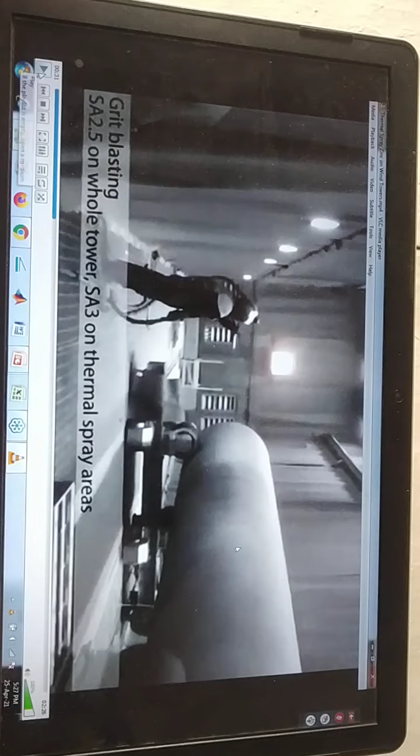First the blasting will be carried out and then the thermal spraying will be carried out. So it will result in a very thin coating. Later on we will see some processes resulting in a thick coating.

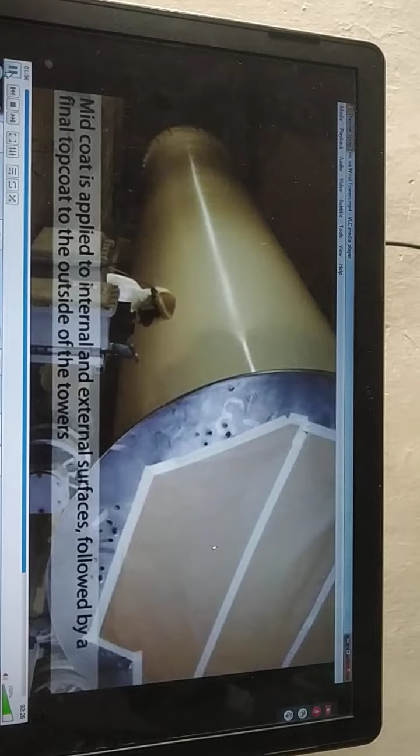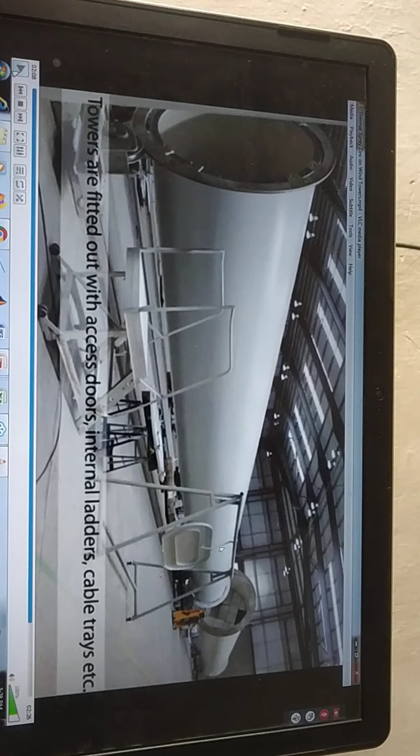So the workpiece needs to be rotated continuously. So this is different from our hot dipping process. Yesterday we had seen the hot dipping operation. Compared to that, this is different.

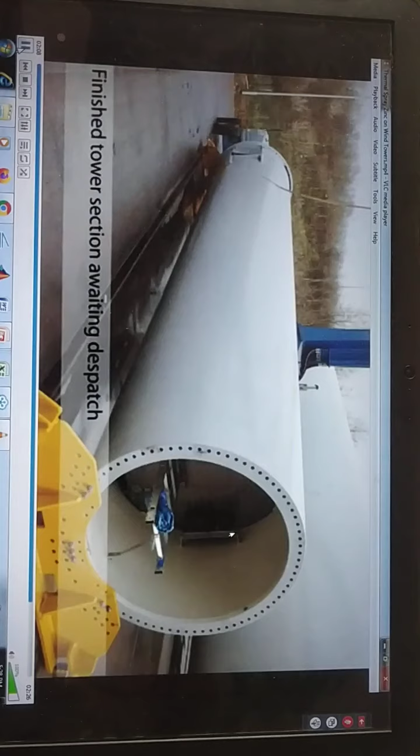Okay, so let us move further. So the spray gun. So this is the working procedure. You are requested to carefully understand the working procedure, which is very simple. That is why we can move further quickly. So here we can save the time on each process.

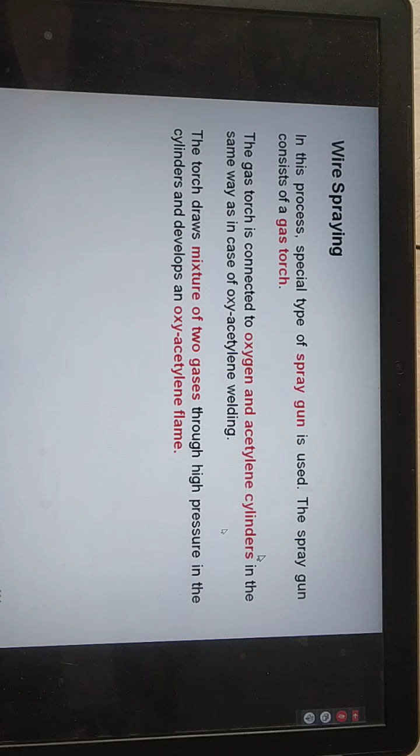Meher Panchal. Mihir. Harshal Chaudhary. Yes, sir. Are you getting it? Yes, sir. Okay.

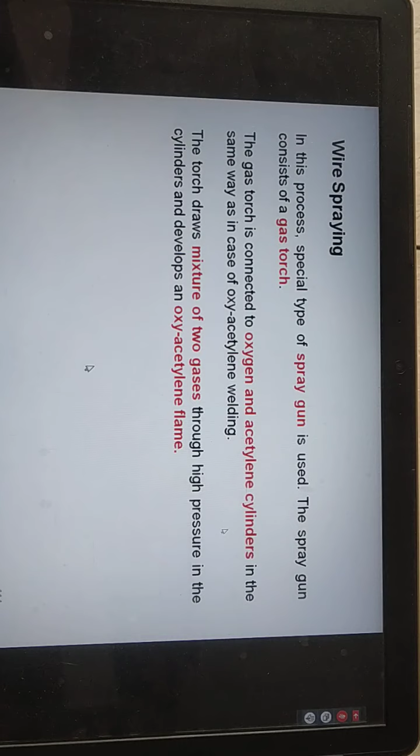So let us... So the procedure is mentioned here. Please understand the procedure very carefully.

So all the products, metallic products, are ultimately subjected to some protective coating, and for that either of these processes will be used. So powder spraying, in that the raw material will be in the powder form, whereas the approach is almost similar. Since finally the material is melted, it is not going to create any problem.

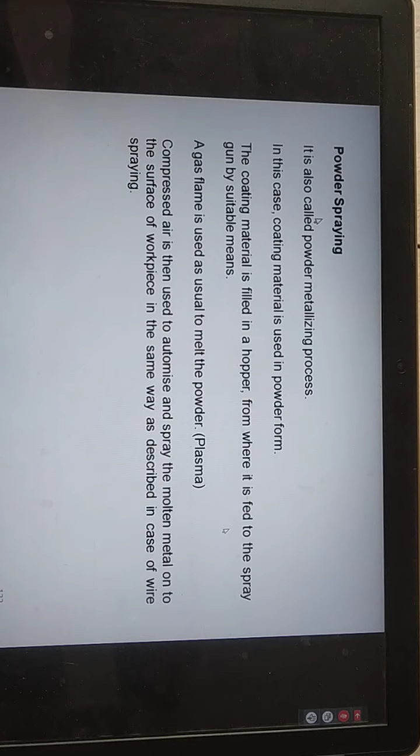Palandra, I hope you are getting it, this metal spraying. Yes, sir. Okay. So even you can see here any blades or any such individual parts of some equipment, those will also be subjected to it.

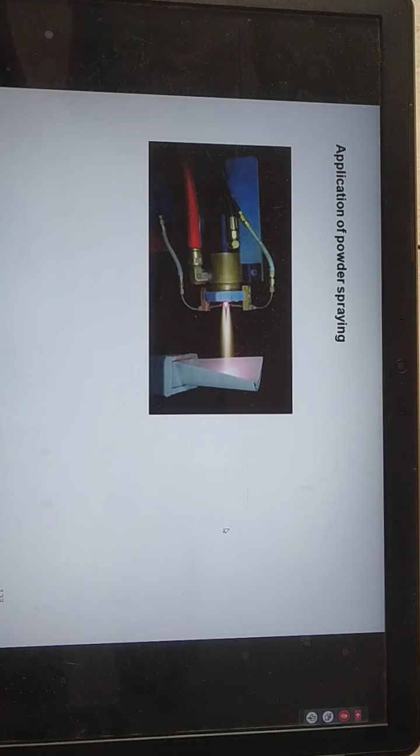You can see the gun. I am interested to show you the gun. So that one common part will have several inputs through which the wire, that metal particle, air, oxygen, those gases will come, and then inside, the combustion will be carried out. So ultimately that gun is nothing but a combustion chamber inside. Okay, so in that we are carrying out the heating and then melting, and then it is sprayed with the help of compressed air.

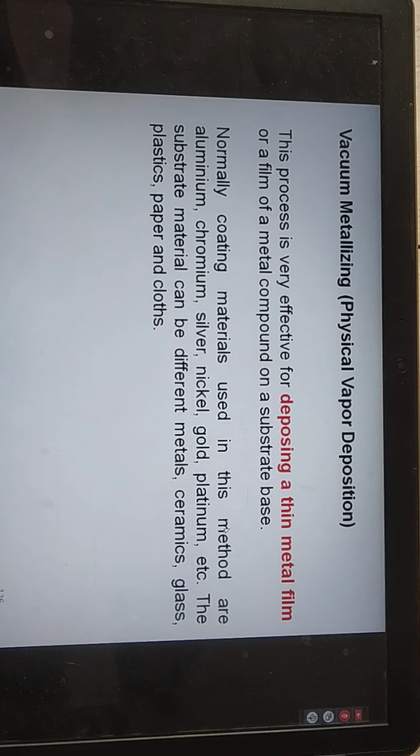Now the next process, a very old process, physical vapor deposition. In short, it is referred to as PVD. It's a very old process. So let us understand this process. So typical coating materials like chromium, aluminium, nickel or any such can be effectively deposited in the form of a thin layer, a thin film.

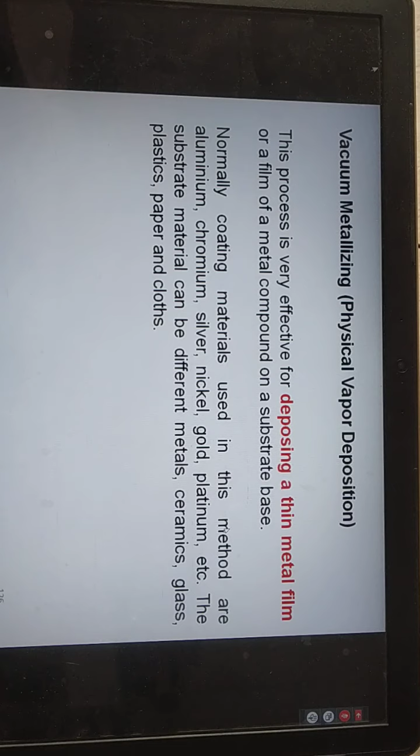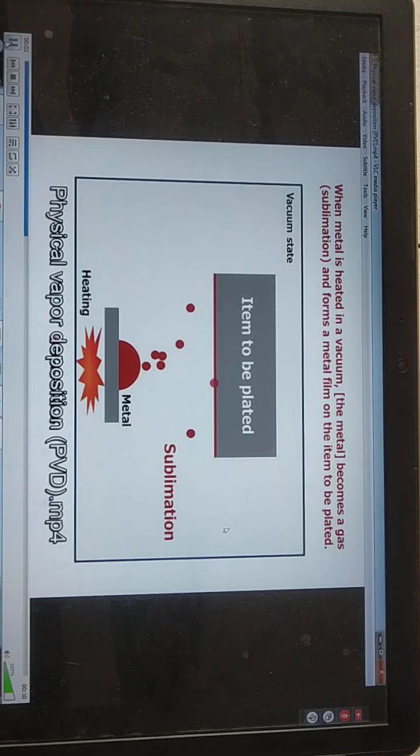So this way, that vacuum is helping us here. So with a very small 10-second animation, you can understand it. So physical vapor deposition: in the form of vapor, the metallic particles are deposited. Okay, so you are requested to draw this diagram quickly. But a very thin layer will be deposited again here.

Rahul Sari. Uraj Darji. I hope you are getting it. Please respond quickly. Shreyash Saudari. Saloni Shah. Please respond quickly. So students are typing. I hope you are getting it. Saloni Shah, you may unmute yourself and you can interact so that your other classmates can also hear you. You are typing there. Manugar Prada. Yes, sir.

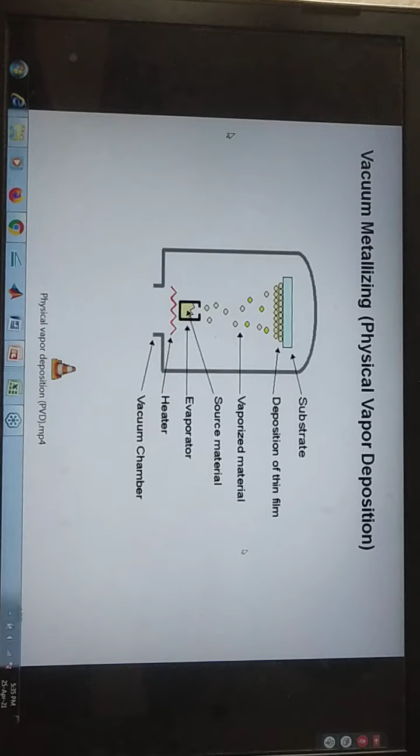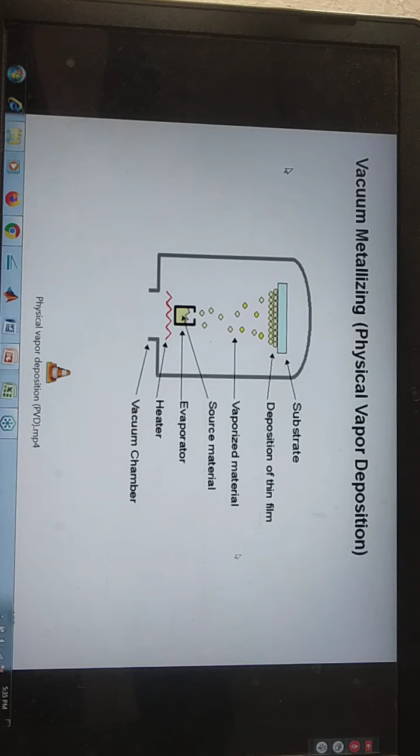Is it clear? So I have chosen some small videos, because such processes can be effectively explained with small videos. Okay, so now you are in the last stage of your graduation studies, so you are well aware of how to understand such processes very clearly. Okay, so physical vapor deposition is a very old process available in industry. So those who are interested may note down this procedure.

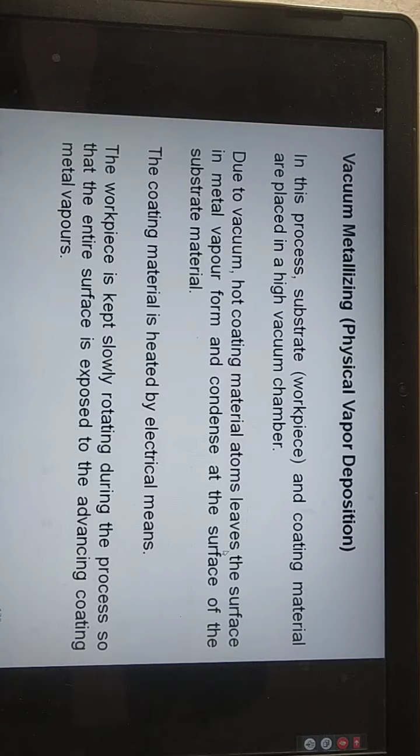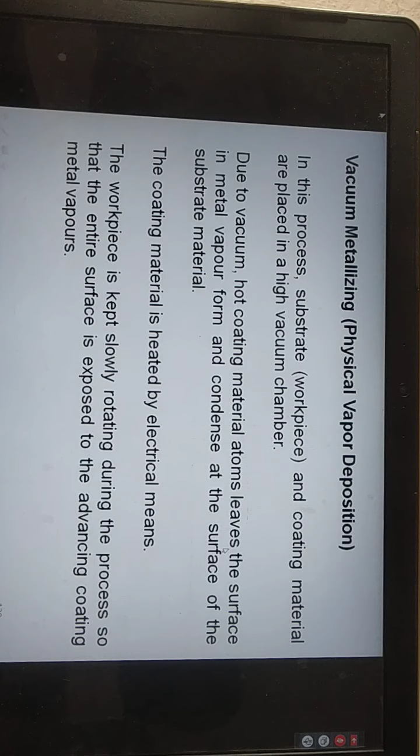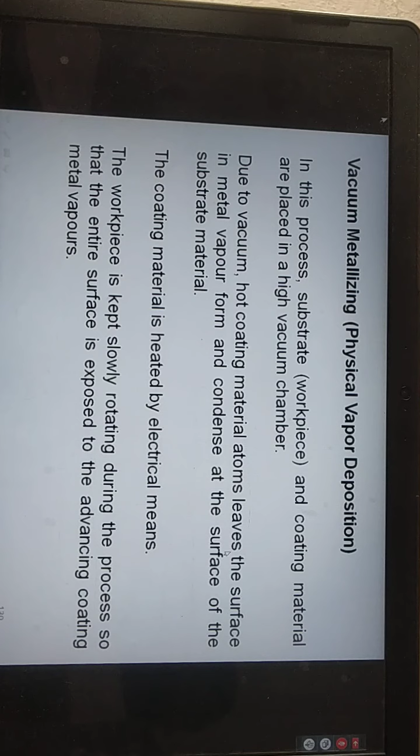So the source of heating may be some electrical source. We know that with the help of some electrical supply, we can generate some heat and the material will be heated. So the workpiece will be rotated so that the entire surface of the product will be exposed, and the rotation speed will be maintained accordingly so that uniform deposition will be obtained.

Okay. So these are some advantages: thin coating. So less quantity of metal is consumed. So wastage of material is comparatively less. So no major equipment is required for this, unlike our previous case, that is metal spraying. That gun itself is very costly, and the gun itself has its problems. So that type of equipment is not used in this. But the thing is that it is a comparatively slow process.

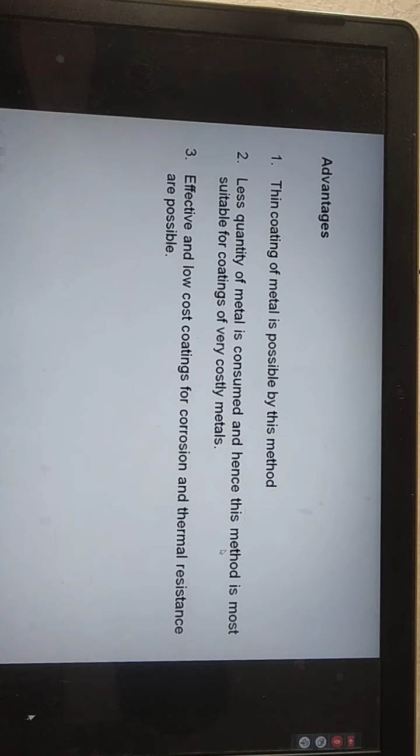Some examples are shown over here. Now the next process. So I am quickly rushing through. I hope you are getting it, but if anyone is having any doubt, one can immediately inform me, one can immediately raise the doubt. High velocity oxygen fuel spraying, HVOF.

Later on we will see towards the end one tabular information in which we will see, by which process, how much will be the velocity there and how much will be the coating thickness obtained there, average, as a representation. So high velocity oxygen fuel spraying.

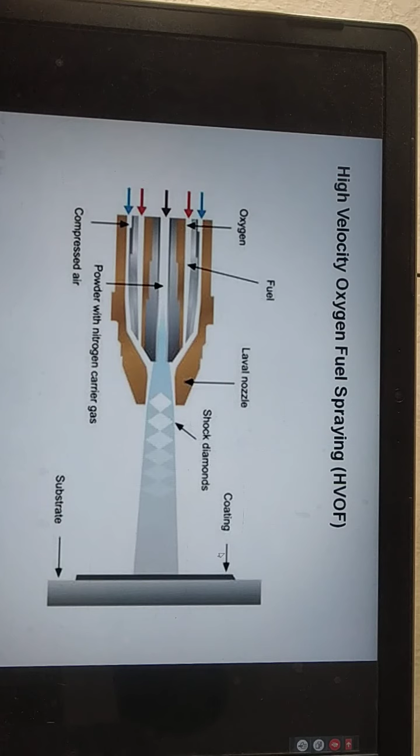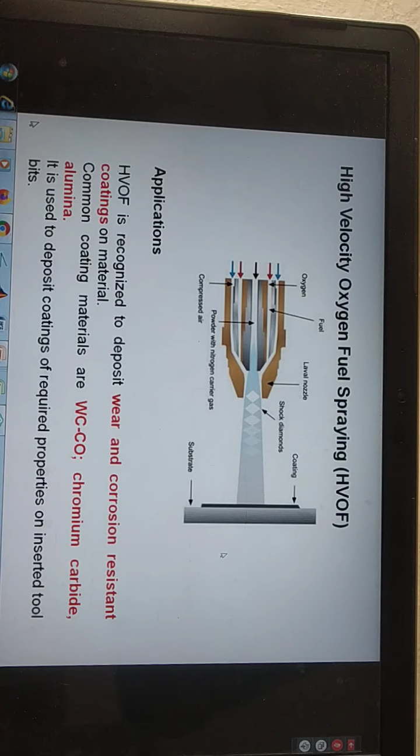So here the materials like carbides and alumina, which are very hard in nature and even having very high melting point, those are used as a coating material, and by that a very good quality wear resistant surface and corrosion resistant surface is obtained.

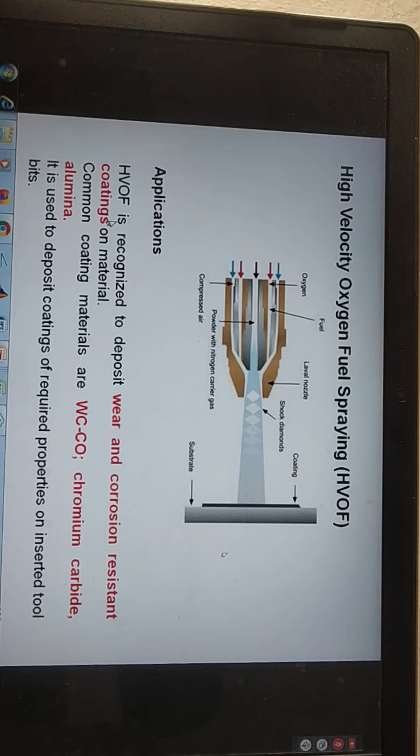So very high velocity will be generated here in that material which is sprayed. So it is very much similar to your metal spraying, except that velocity will be very high. So let us quickly see one small video. So the impact is very high here because of that high velocity.

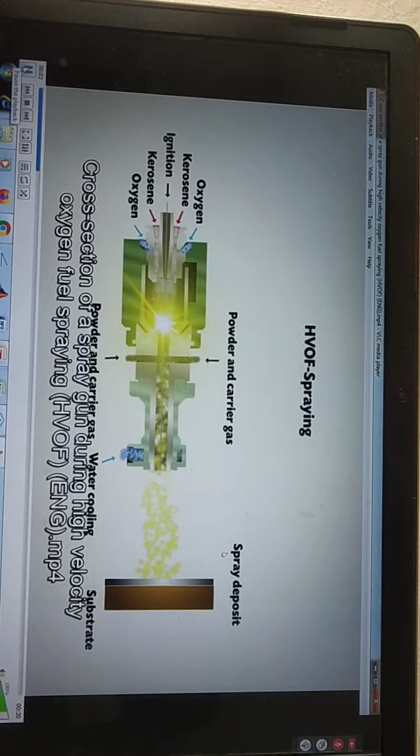So you can see here different input, oxygen, kerosene, then the ignition will be carried out quickly. Let us have a look to it, and then at the latter stage the powder and carrier gas is introduced. Depending on the requirement, water cooling will be provided surrounding the gun. Otherwise the gun itself will be suffering with some problem. So here it is HVOF.

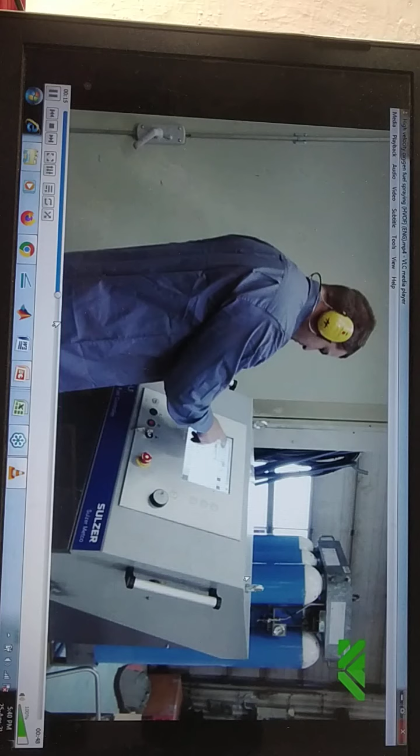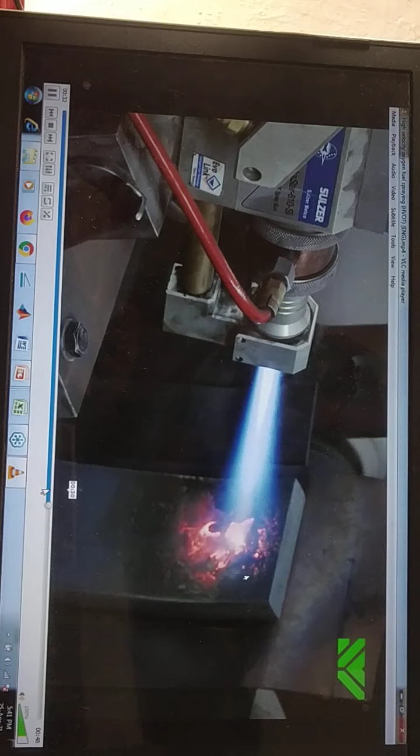So the powder, so the high velocity will result into good quality bonding also. So you can see here, this is that HVOF process. So the gun is moved with the help of some fixture conveyor arrangement so that uniform deposition will be carried out. So carbides are the most commonly used coating material here. So you can see the setup. So manual work is avoided here so that uniform thickness will be achieved.

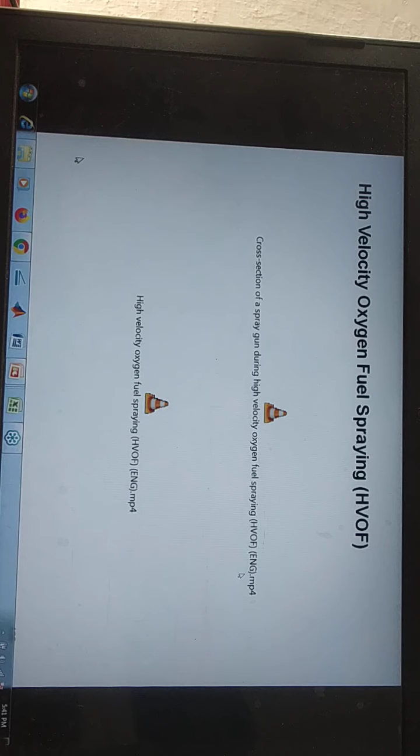Sir, yes? Can you go back to the schematic of the nozzle? Just one minute. This one. Yes, sir. Yes. What is the doubt here, Tanmay? No, sir, no doubt, sir.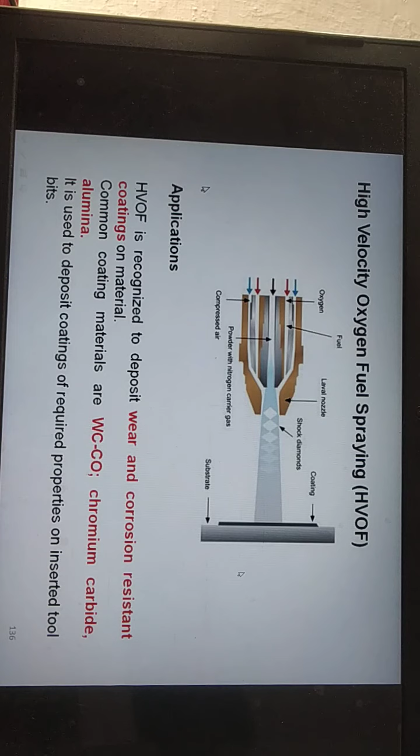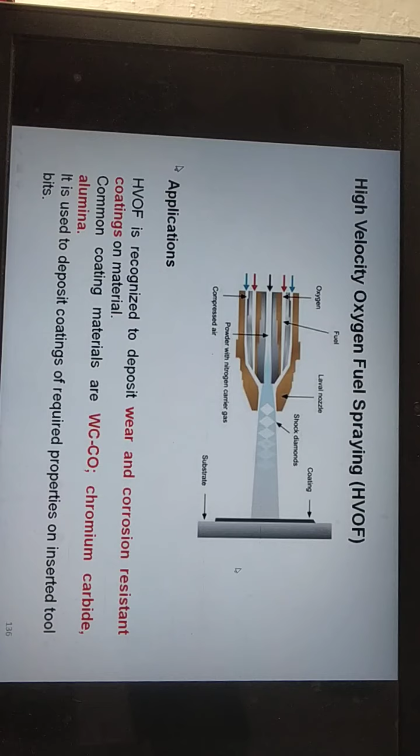I just... Okay. So all are requested to draw the diagram also, because suppose in the exam some question comes, always support your answer with some diagram. The questions will be open-ended. It will not directly ask you to explain or describe some procedure, but there will be some twisted questions. So one needs to understand the question and accordingly explain it, but while explaining, some diagrams will be useful to support your answer.

Yes, Tanmay, I think you are trying to say something again. No, sir. Okay. Naresh? Yes, sir. I hope you are getting it. Yes, sir. Okay. Shitanshu? Yes, sir. Okay.

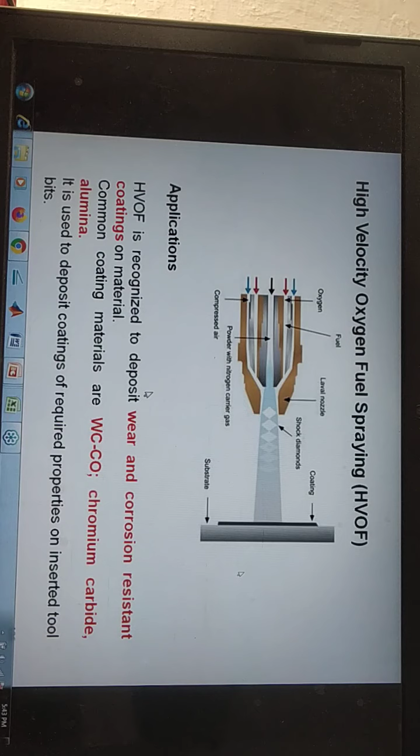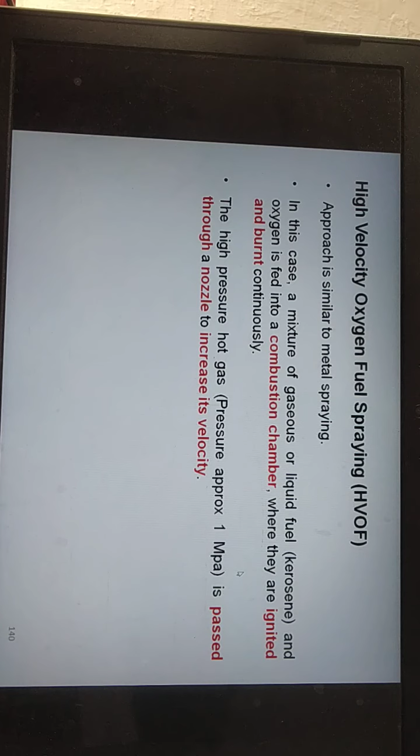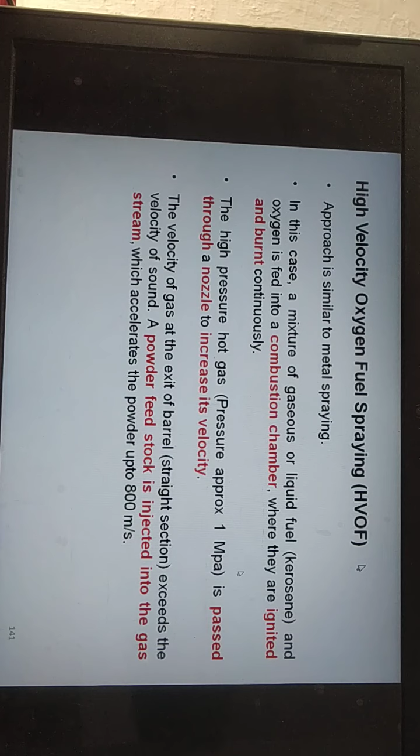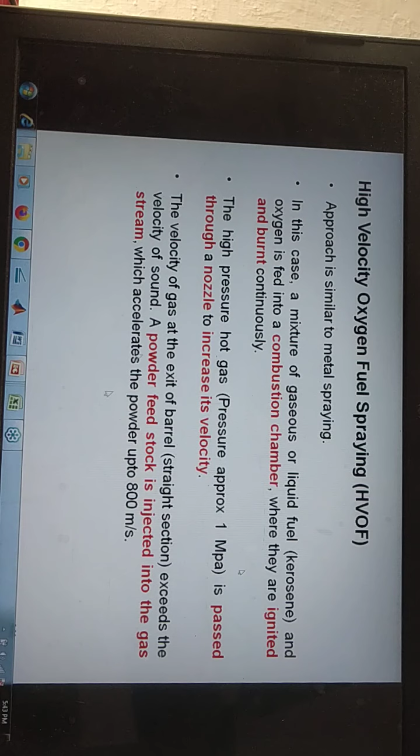So that is called the combustion chamber also, that inside portion of the gun wherein the material will be melted. So the velocity of up to 800 meters per second. Later on there is some tabular information in which we will see that velocity in the range of 1200 meters per second may also be obtained there.

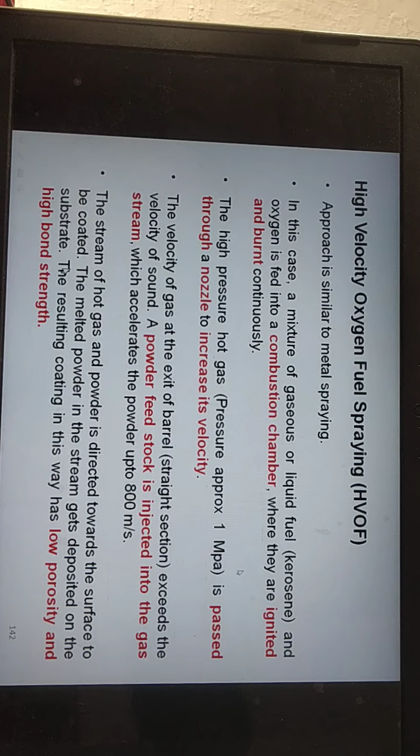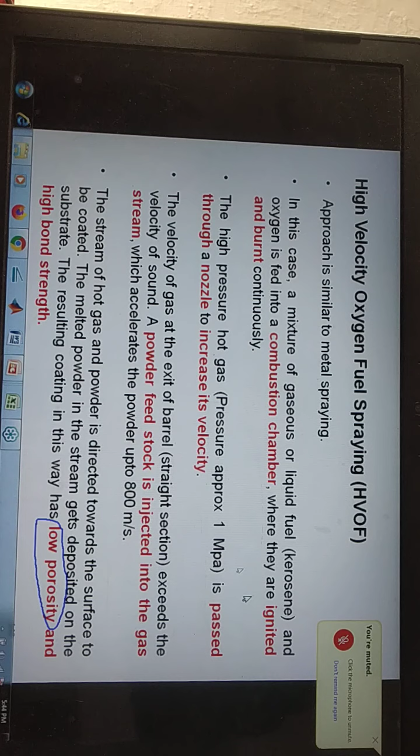So the benefit of this is low porosity and high bonding. One important thing here is that in all such spray coatings, there are chances that some porosity or defect is likely to take place in the coating. I hope you are well aware of what porosity is as a defect. Anyone? Please quickly refer to this defect. Nikhil? The high velocity of oxygen has a chance of entering. No, it is likely to take place during the coating.

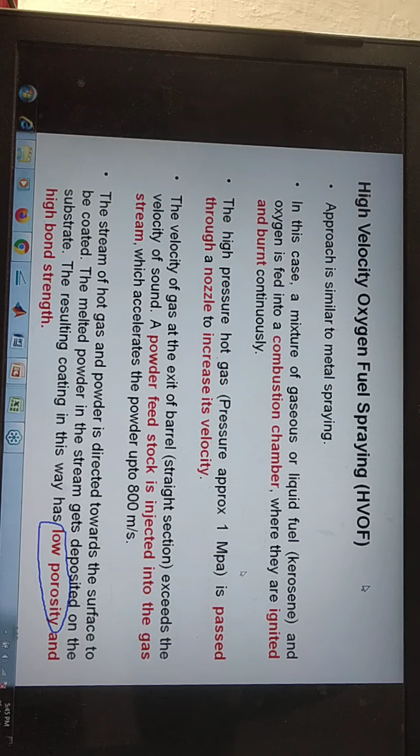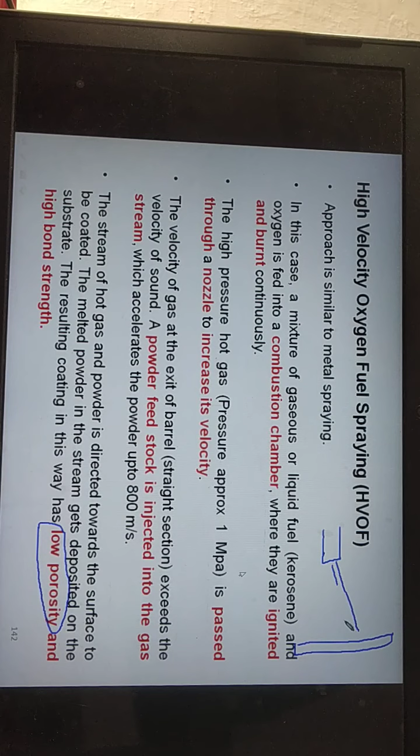In case of wire spraying or powder spraying, we are initially melting the coating material and then depositing it on the substrate. So once it is deposited, it will start to solidify, and during that time air or some gases may get entrapped, which will lead to porosity.

Yes, okay. So sometimes the gap between the gun and the substrate material may have some surrounding air, and that may be trapped inside along with the metallic particle and carried there, and sometimes after depositing, those air pockets may lie down there, and those may be trapped inside.

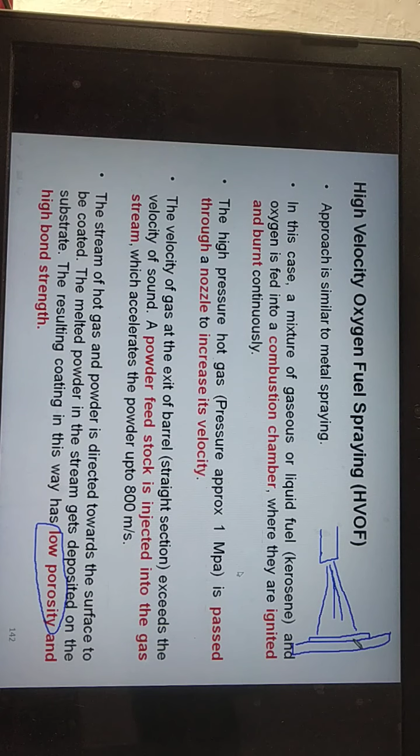So we will see as tabular information which type of process will result in how much porosity. Normally that porosity will be in the range of 2%, 3%, 4%, 5%, like that. So minimum is the best. 0% porosity is the best. That means no porosity, no defect. So the lowest value is preferred. So those types of issues are there in coating.

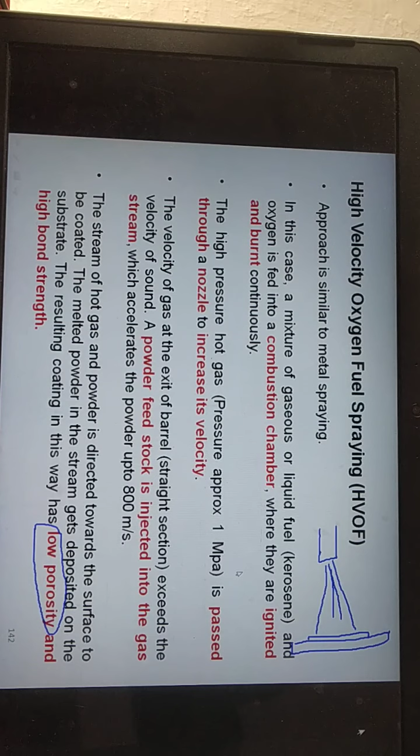Even you may realize it at home, at the wall. Suppose you are carrying out some painting, there you will find some air bubbles are trapped inside, and it will result in some pocket inside. You might have witnessed it at your home.

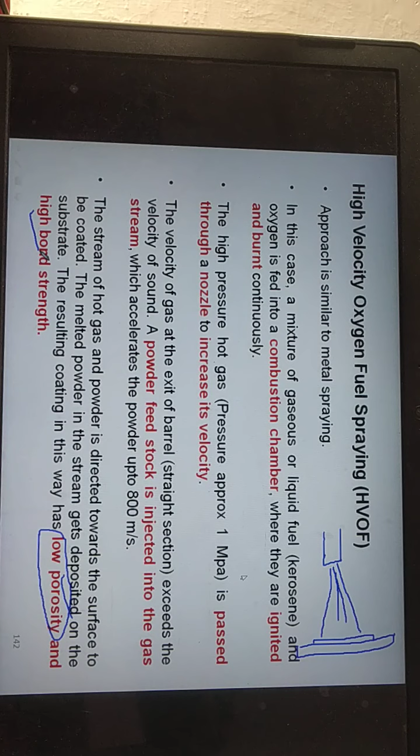Okay, so this high velocity process has very low porosity, and high bonding strength is obtained because of the very high impact compared to other processes. Is it clear? Suyash Singh.

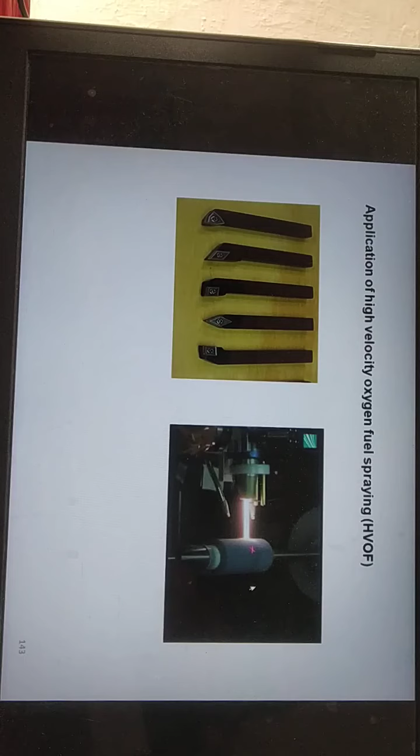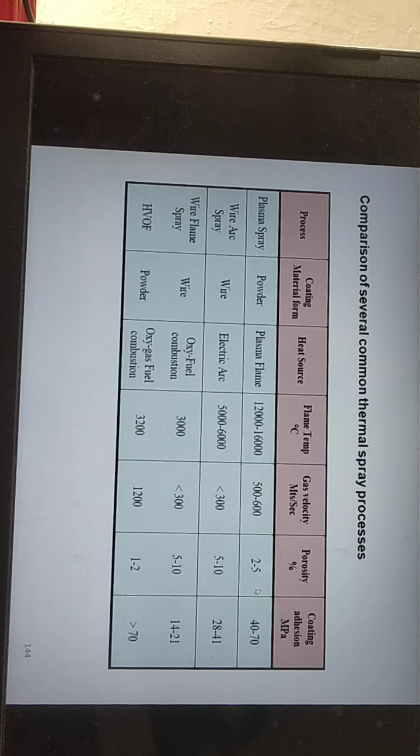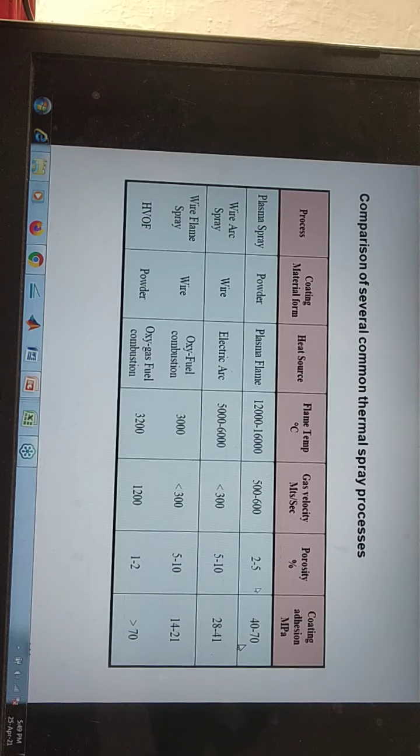Suyash, products provided with some coating deposition with the help of the HVOF process. So here is one sort of comparison between some processes. So here the porosity is very less in case of the HVOF process. The velocity is up to 1200. You can see in the case of HVOF, the velocity obtained is in the range of 1200.

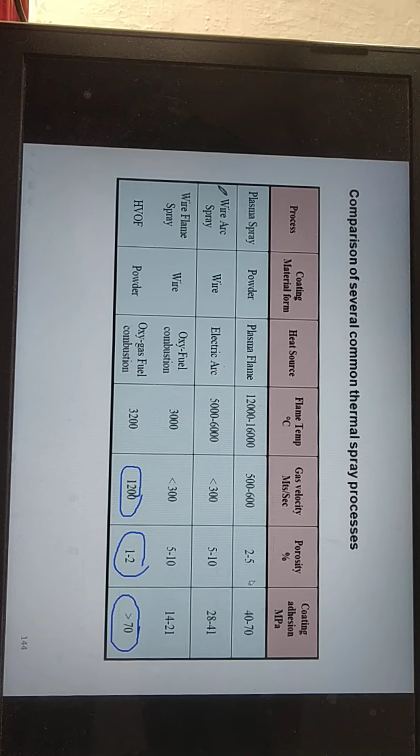So this data is taken from some literature in which some researchers carried out some comparative work. The porosity is comparatively less, and even the strength obtained is very high. The strength obtained is compared with the wire spray process and plasma spray process. Naresh, is it okay?

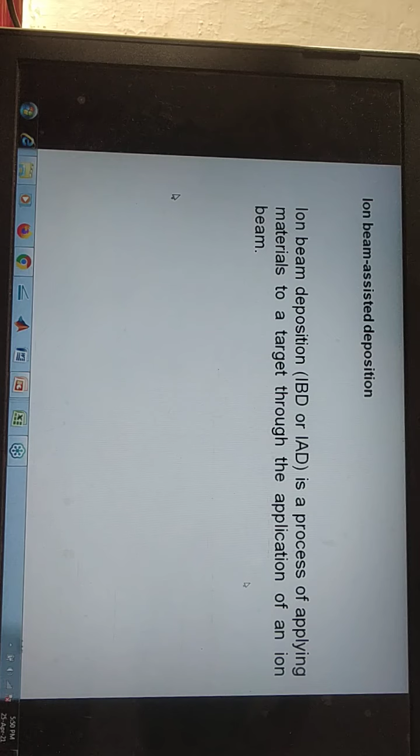Yes, sir. So another process, ion beam. This is a little bit advanced process, used with some good quality products. Ion beam deposition, in short it is also called IBD or IAD, ion beam assisted deposition. So application of ion beam will be used here.

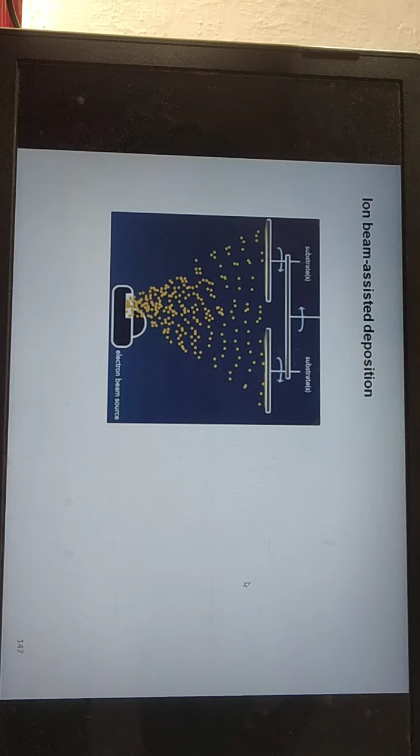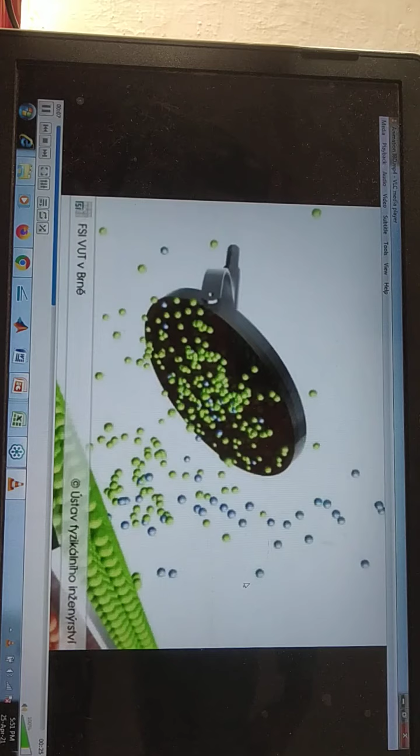So here you can see even one small video is also there. So an electron beam source will be there, and that will be allowed to move and deposit on the substrate material. So you can see one small video for this. You can see here the different materials, that's why different colors are shown there, different elements.

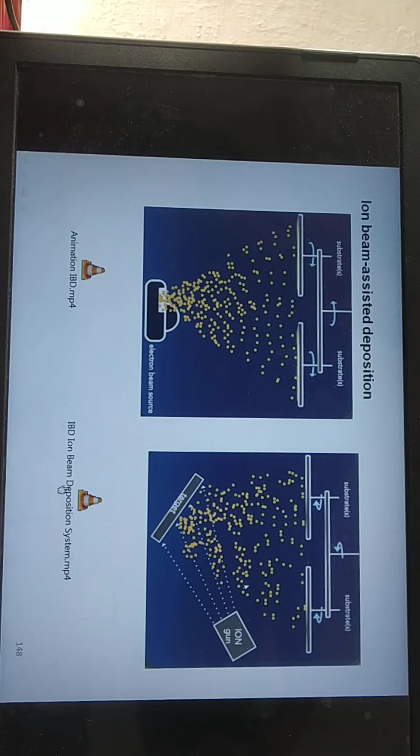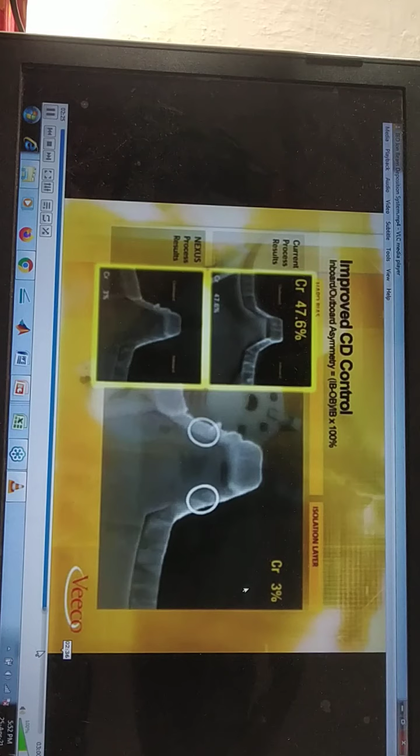Even so, very advanced process. So very advanced process. Ion beam assisted deposition.

So the material to be deposited is ionized here, and that material will be deposited on the product. So modification. Slowly, as people are realizing the importance of surface engineering, various modifications are continuously going on in the existing process.

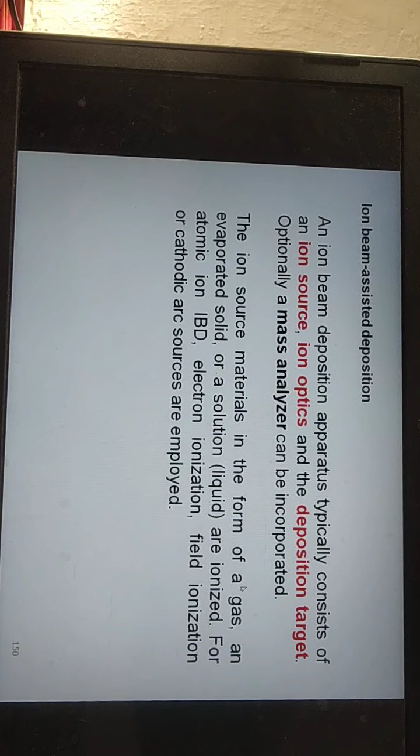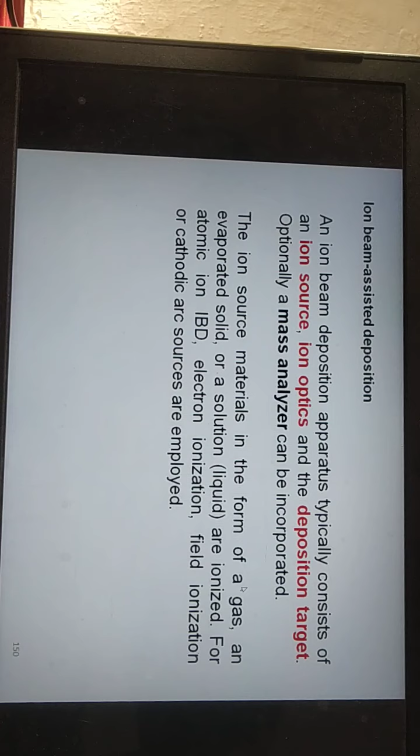Some different technology is used, but the ultimate aim is that the coating material will be melted and deposited on the substrate material. That is the basic philosophy. Okay, and one has to ensure the bonding is good there, and the interface should not be separated. Some life should be there in that interface. Interface is nothing but the joining of the overlay and the substrate material.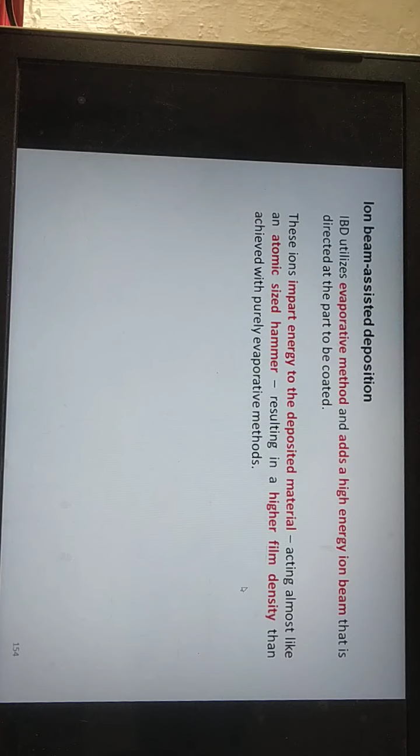Okay, so some activities, some steps related to ion beam assisted deposition, but it is used in very selective cases because it is a costly process. So the output in the form of good mechanical properties will be obtained, but yes, it will be a costly process, and hence depending on the application it can be used.

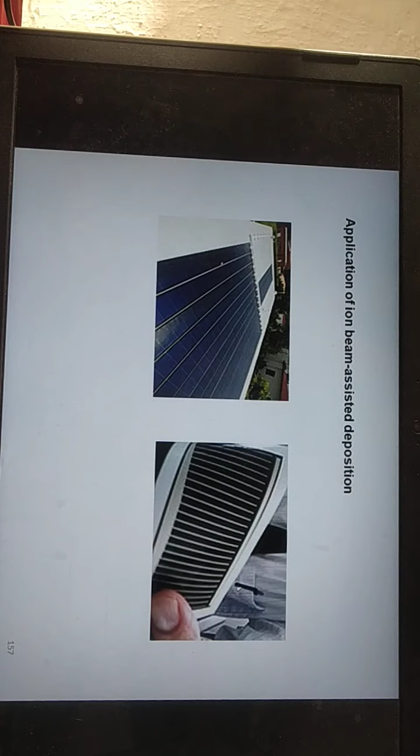Now the thick deposition. The previous processes we had seen were thin deposition, but now here we will see some thick deposition processes. That is called cladding, hardfacing or weld surfacing. Being a thick deposition process, typically the welding process will be used here to melt the material and deposit. Ultimately, the material to be deposited needs to be melted and

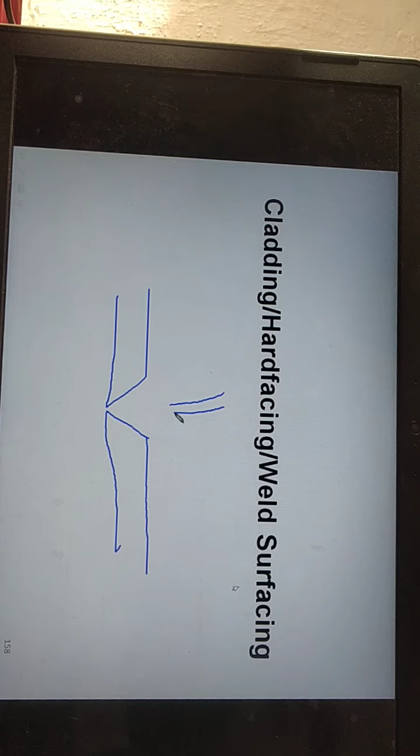it will be deposited. Let us see our traditional welding operation used for joining the product. The electrode which is there will be melted and that material will be poured in the cavity to fill the cavity, and then the joint will be carried out. So ultimately the material is melted there also and it will be filled in the cavity.

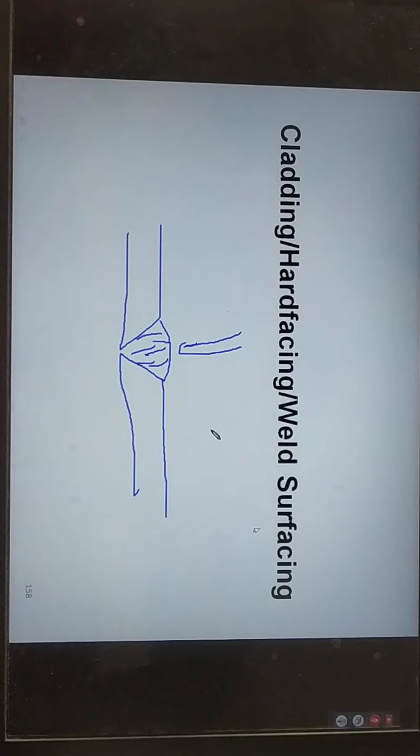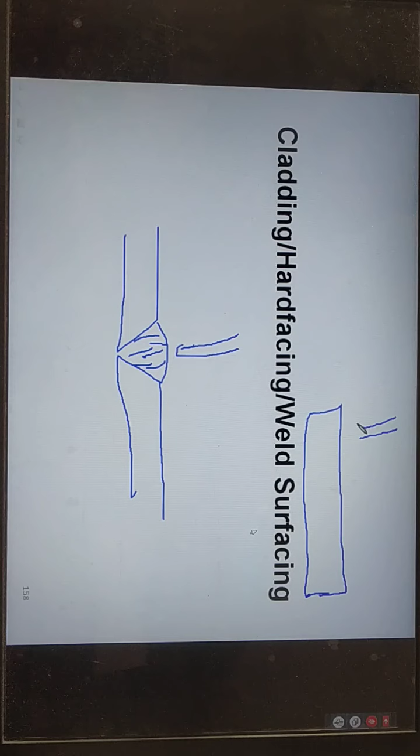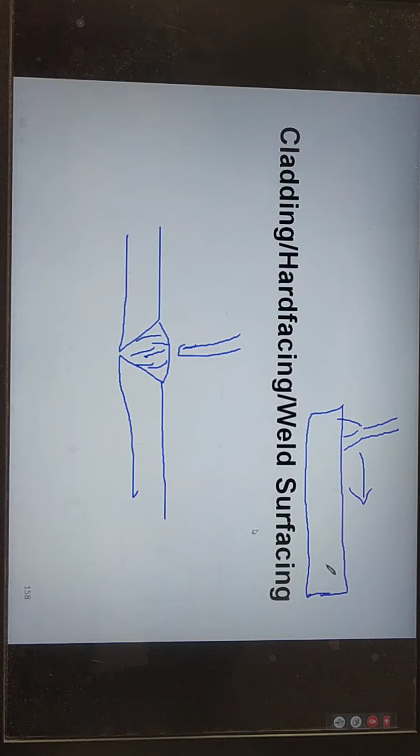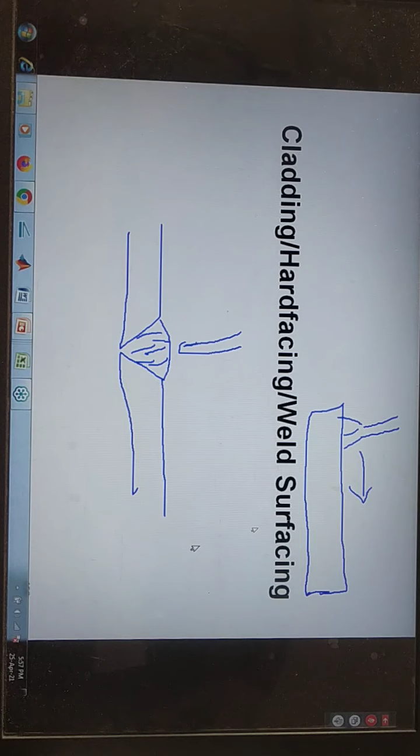That same approach will be used, but the difference here is that instead of joining the two parts, the surface will be there and on that surface the electrode will be used, and that electrode will go on depositing the layer and it will move continuously. That approach is used by researchers and industry people. So a very good use of the welding process. Let us see that also, one quick video for that.

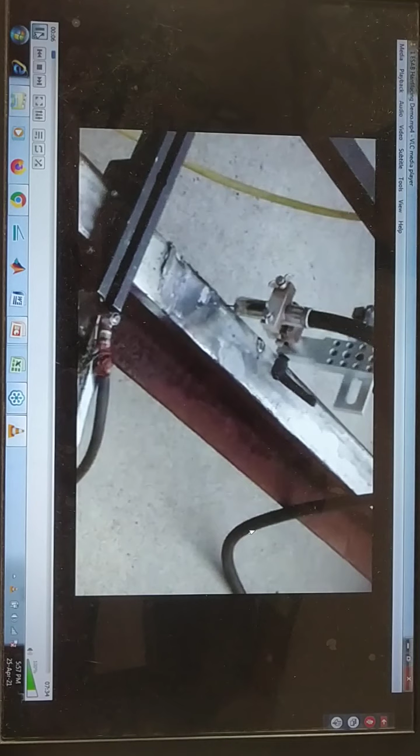Here you can see a railway track or that type of product; initially the base material will be there, and on that the cladding will be done now. You can see the gun; the raw material is in the wire form, and the gun is going to deposit the material.

I hope the videos are visible clearly. Is it? Please someone quickly respond. Anugrah, is the video visible clearly? Yes, sir.

So you can see here, depending on the width obtained in one pass, multiple passes will be used. Here one pass is generated, then the second pass will be there, then the third pass, so that the entire surface will be overlaid.

This type of setup we also have in our lab, the advanced welding lab, but the process used there is plasma arc welding, which uses the raw material in powder form, and it will be melted and deposited. Normally I take the final year students there to show the actual deposition, and students are also allowed to carry out that activity there.

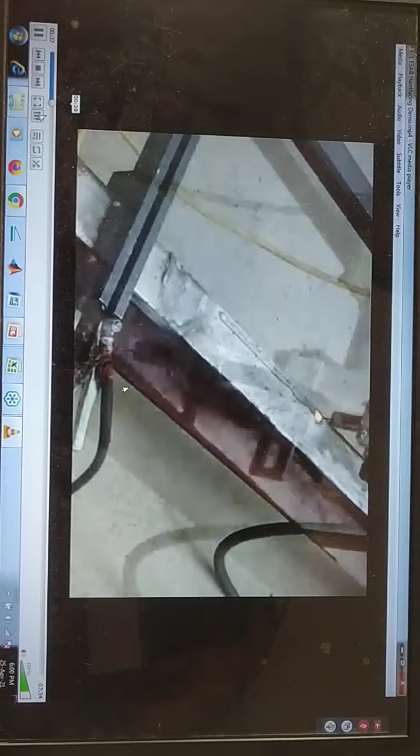Even the punch dies available in industries, if their surface is degraded, then instead of throwing or rejecting that punch die, they will clad it, achieve some deposition, finish it to a good quality surface finish, and then reuse the product. So I am moving on. Here you can see, this way it will be deposited. It will take its time accordingly.

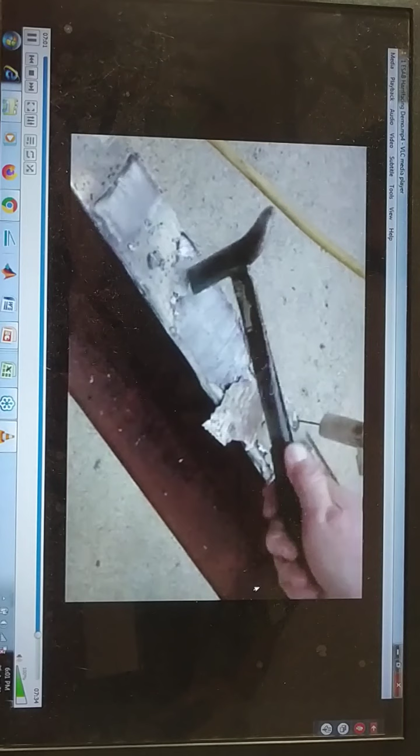So this way, very systematically, these welding processes are used for cladding purposes. You can see a very good quality surface finish is achieved on the product. Many such products have now shifted to such surface engineering processes. Surface engineering is evolving as a good approach in industry, because they have their existing raw material, which otherwise they are rejecting and throwing.

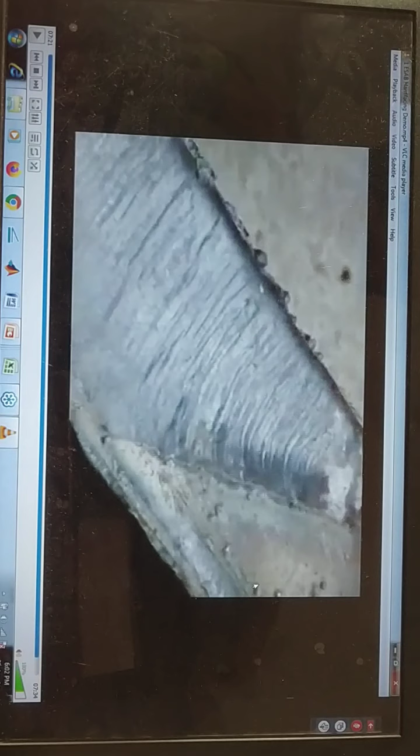But now they are thinking, yes, make best use of that existing material, because the bulk quantity remains the same. Please remember your substrate material; the bulk quantity will be of ordinary material.